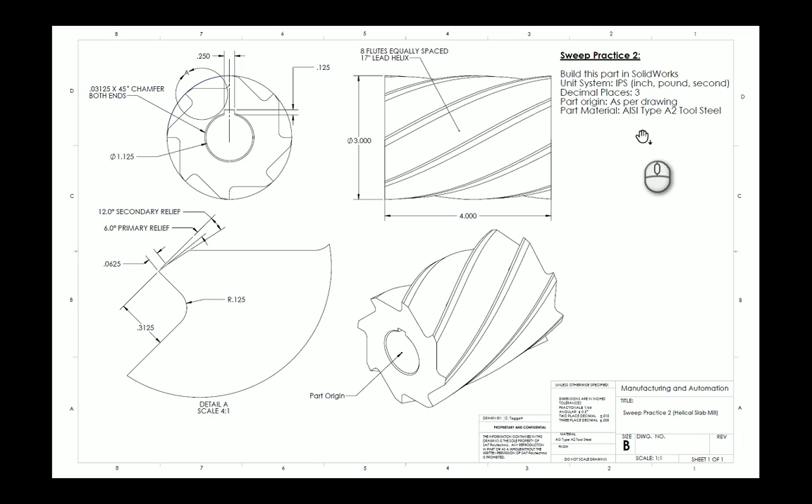So let's go to SolidWorks. Again, one of the things I would say is have the drawing open so you can follow along with me. I'm going to open a new part.

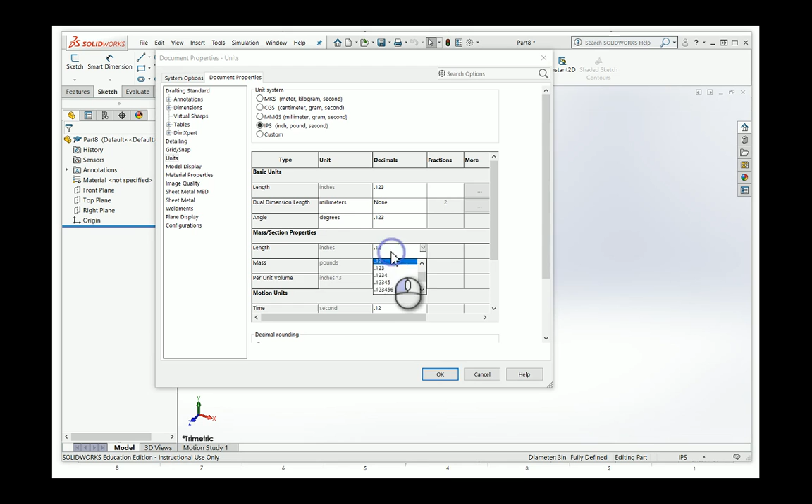My machine defaults to MMGS, so I'm going to change that. I'm also going to change the units. Let's change those to 3 decimal places. Say OK. So I'm all set, ready to go.

If you look at the isometric view, you can see the cylinder this is based on is sketched on the front face. So I'm going to click on the front plane and open a new sketch.

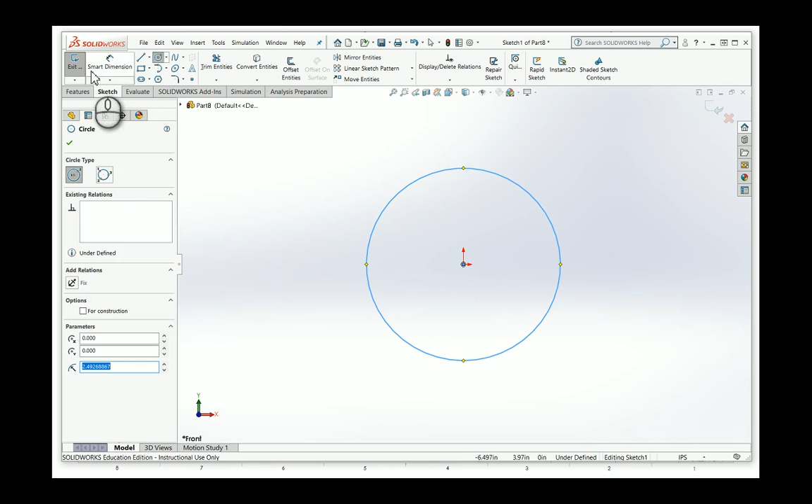I'm just going to draw my circle, which is 3 inches in diameter. Then I'm going to extrude that for the length, and it's going in the wrong direction, so I'm going to reverse direction, and I want it to be 4 inches long, and say OK.

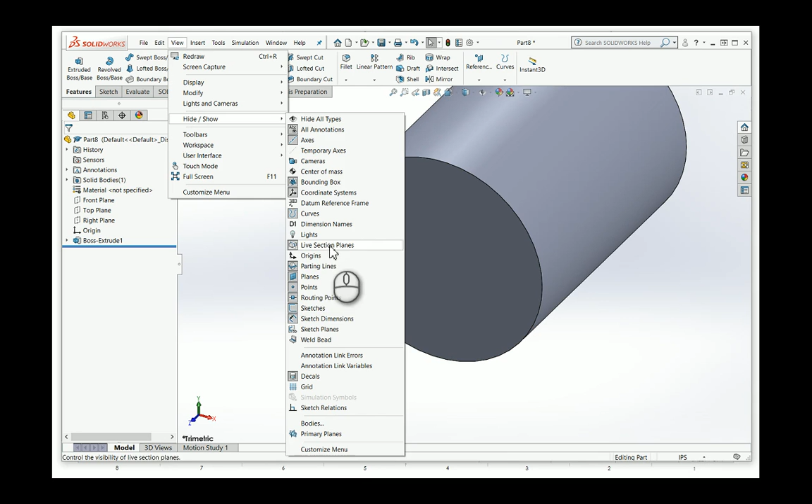And then just as usual, I'm going to check hide show origins. There it is in the front, and if I just turn that and go back to isometric, there it is perfectly in the correct position.

Now what I'm going to do is create my helix. What a helix needs is just an open sketch with a circle in it.

So I'm going to click on here and open a new sketch. I'm going to go normal to it. And what I'm going to do is just touch that edge and convert entities. That's brought a circle into my sketch.

The reason I chose to convert entities is because if at some point in the future we change this model to make the slab mill a larger or smaller diameter, that circle will automatically compensate and stay with the new size. If I just gave it a blind 3-inch diameter, and later we change the model, probably the helix will fail—it either won't contact the material or something will go wrong. So this is good practice.

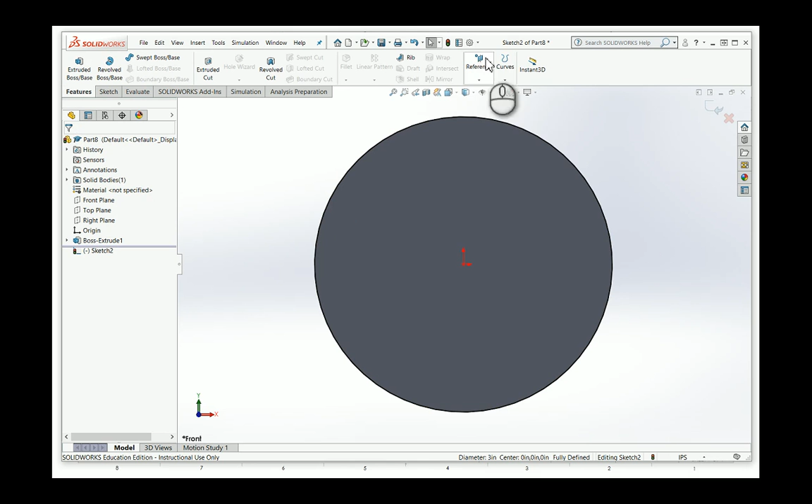Okay, so what I'm going to do now is go to the features toolbar, and click the drop down under curves and select helix and spiral. So what I'm interested in—and I've done this before, so it's just picked up that same thing—but let's walk ourselves through it.

I can choose the way I select the helix: either by pitch and revolution, and it'll calculate the height; or height and revolution, and it'll calculate the pitch; or height and pitch, and it'll calculate the revolution. So we've chosen height and pitch. Spiral is what you get if you've got a traditional clock spring. So we're going to go with height and pitch. It's a constant pitch.

My height is the length of this guy, which is 4 inches, and my pitch, which is the same as the lead in this case, is 17 inches.

What you might find is that this guy is out the front like this. If that's the case, just reverse the direction. And you might also find that it's in an awkward position. I want my helix to start at the 12 o'clock position, which in mathematics is 90 degrees. It might default to clockwise, but ours is actually counterclockwise. So I'm going to say OK.

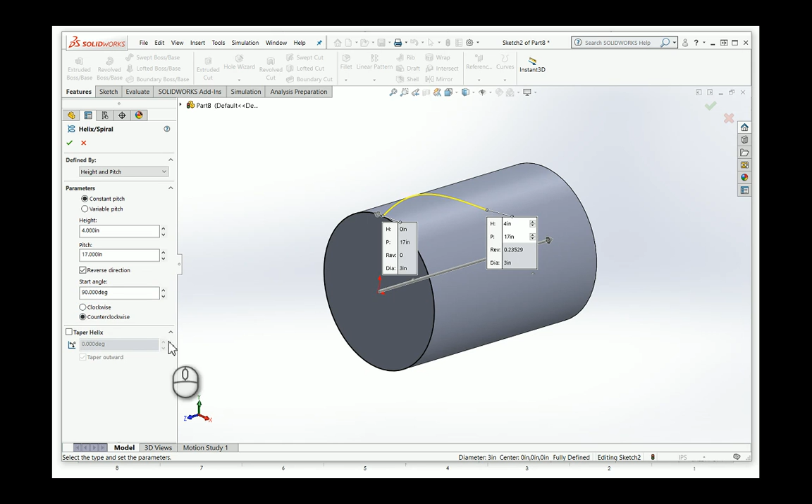So what I've got there, and it shows up as being blue, this is my path, the path that my swept cut is going to go down. What I'm going to do now is open a new sketch on that front face. I'm going to click that edge again and do another convert entities. This is where I'm going to sketch the shape of the groove that I'm going to cut in this. So far so good.

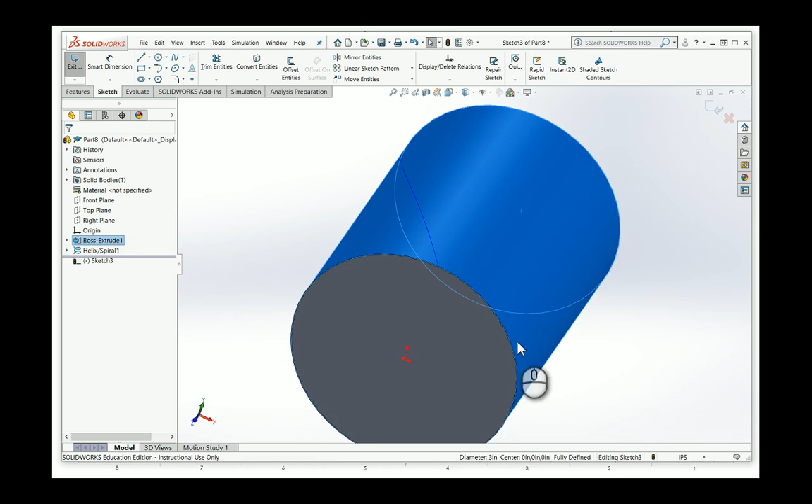So what I want to do now is hide this guy, so I can't see that solid body anymore. For some reason it's going a bit crazy. Let's just do this. There we go. So there I've got my helix there. All right, so now let's just start sketching.

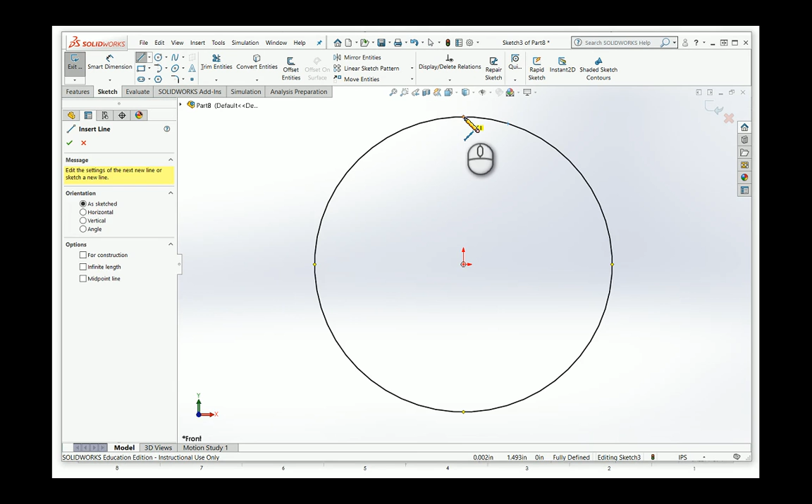So what I'm going to do is put in a tooth here, and you see it gives me top dead center. I'm going to come down and go out to here. Let's just zoom in a bit. And then I'm going to go down like this, and then down again, and finish that on the circle there. All right, so that's snapped to the circle.

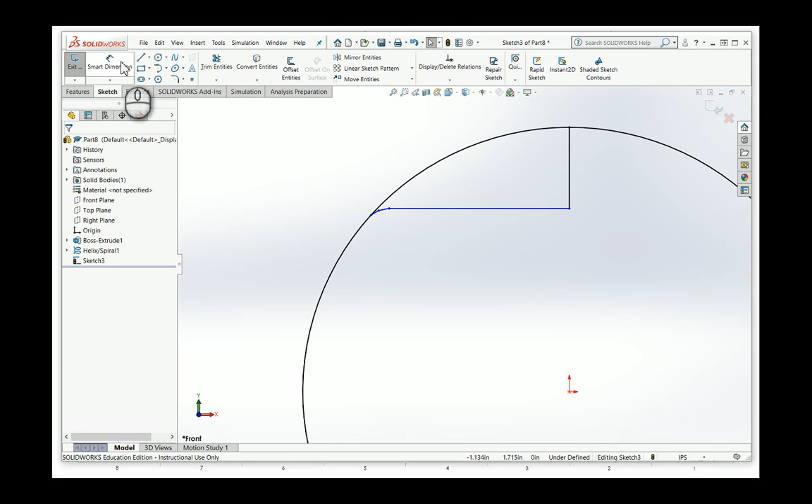So what I want to do now is I can do all sorts of different things, but what I'm going to do is actually put in a center line, two center lines, one here like that, and another one. And you remember center lines don't affect our 3D model.

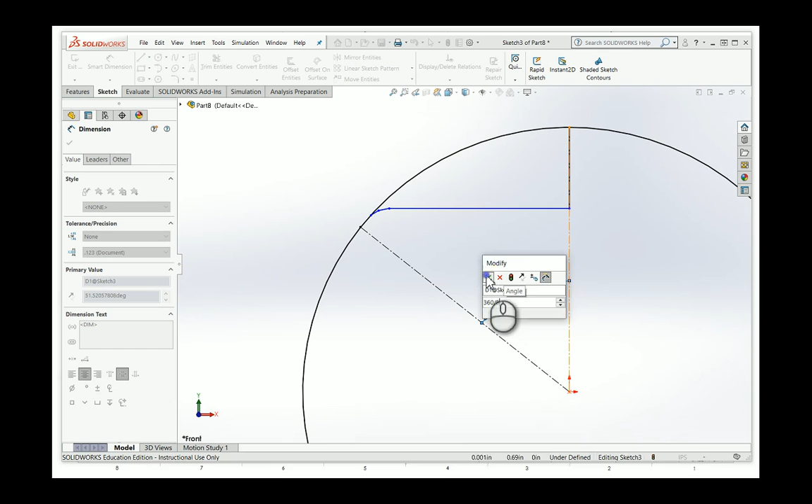What I'm going to do then is dimension this 45 degrees. And if you're not sure why it's 45 degrees, it's 360 degrees divided by 8. And you remember I can use this as a little calculator and say OK. And that gives me 45 degrees.

OK, and what I want there, this is going to tell me the size of the tooth. So what I want to do there is just move this guy. I want this to be coincident with that.

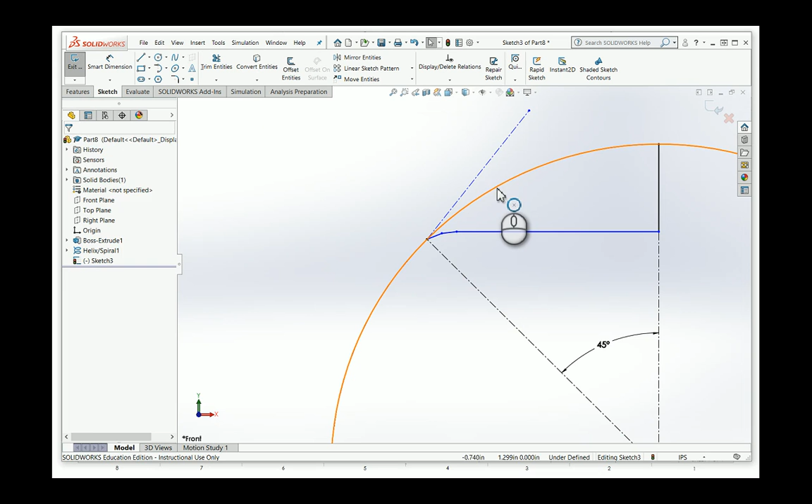What I also can do now is take this, create another center line, start it on there, and just put it out here into space. And now I'm going to create a relationship. I'm going to click the circle, hold down Control, and click the center line, and I want to have a tangential relationship. The reason I want this is because I need a reference to be able to do these two angles, the 12-degree angle and the 6-degree angle.

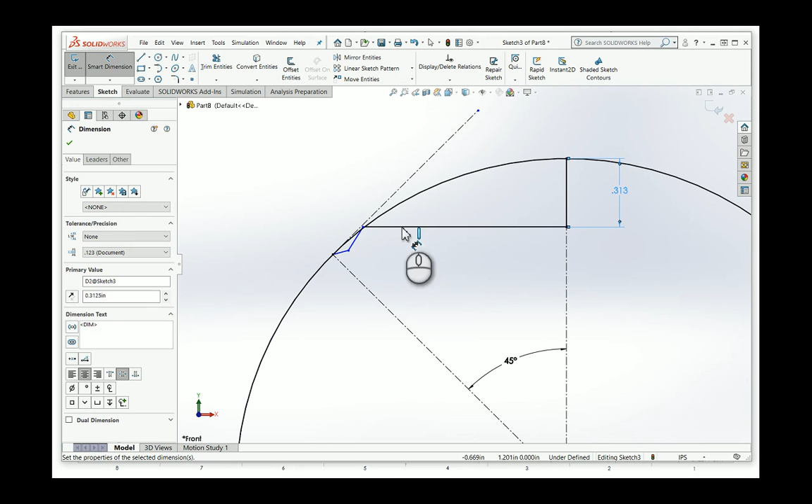All right, let's pop in some dimensions. So this guy here, I think, is 0.3125. That's that. You see that's gone a bit cattywampus on us. So we can pull that out a little bit, and this a little bit.

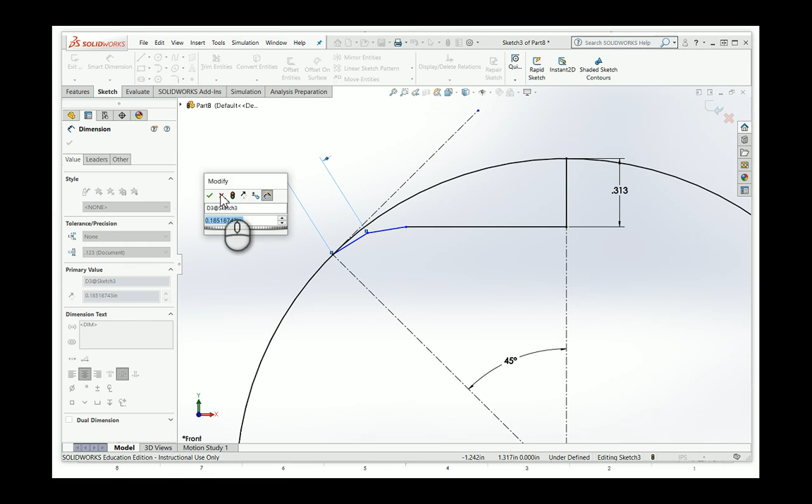All right, so what else have we got? So we know that this line here is 0.0625. Now be careful, because it gave me the wrong thing. Be careful, because what I want is the length of this guy. So I can just hit that.

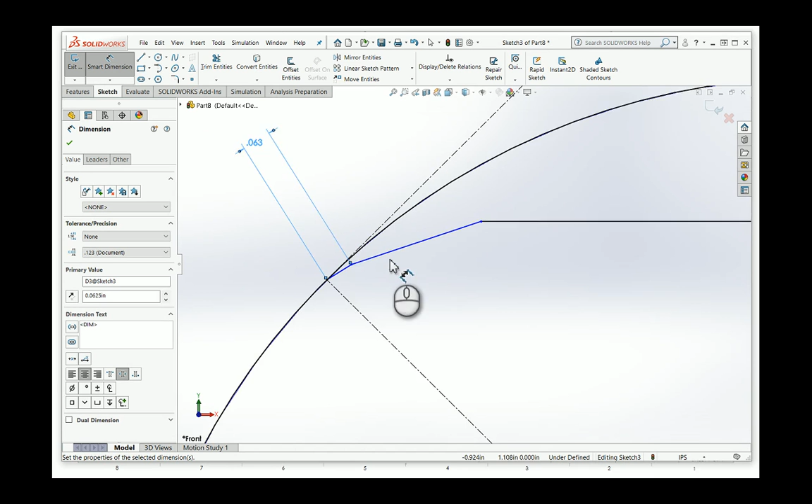0.0625. Enter. That's that. And now what I've got is the primary relief and the secondary relief, and these are an angle. So I click on that guy, and that now is 6 degrees. And then I do the same with this, and that is 12 degrees.

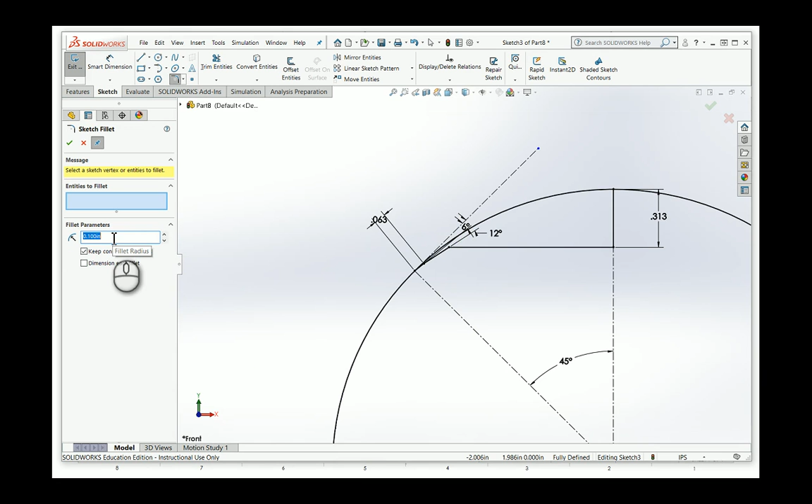And that's what's called the primary and secondary clearance. Okay, so that's all good. The only thing I need to do now is to put that radius on there, 0.125. And I'm just going to hit this guy, say yes please, and that's that.

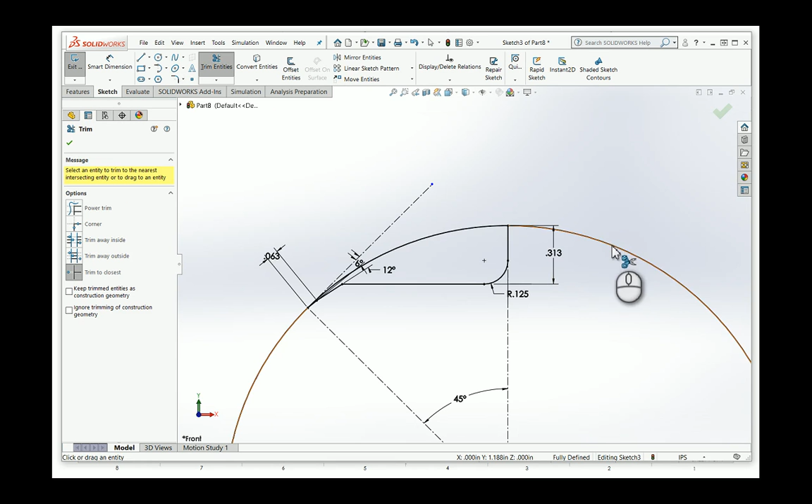Okay, so there's the cut that I'm going to make. What I need to do now is to trim the rest of the circle, because I only want the circle in that one spot. So if I trim that, there you can see now I've got the

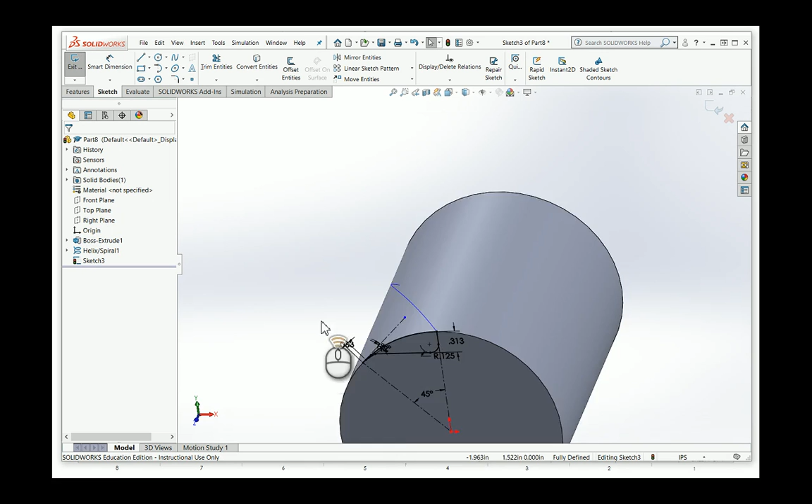path there, and I've got the form that I want to cut. So what I can do now is I can unhide this guy, show it if you like. There it is. So what I need to do, what the

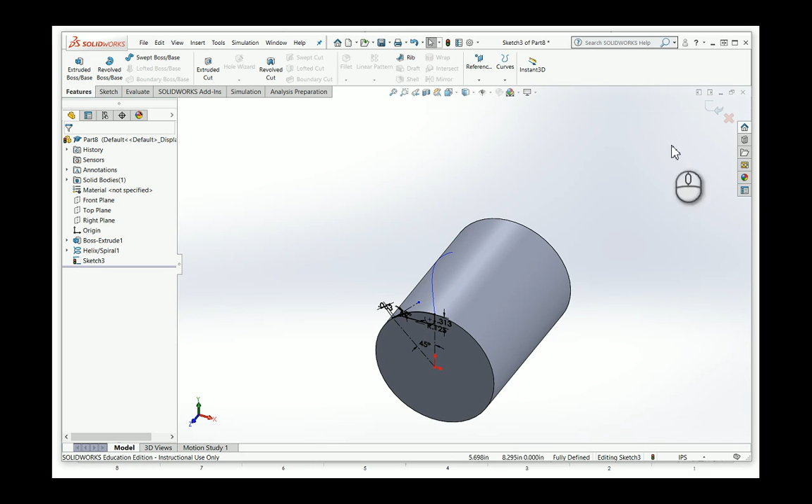pattern will need in a minute, is it will need an axis around which to do the pattern. So I can go to reference... oh, I'm still in a sketch, that's what the problem is. All right, let me close and save the sketch.

Okay, now I can go to this guy, and I want an axis, and basically I can just give it this cylindrical shape, and I've got an axis there.

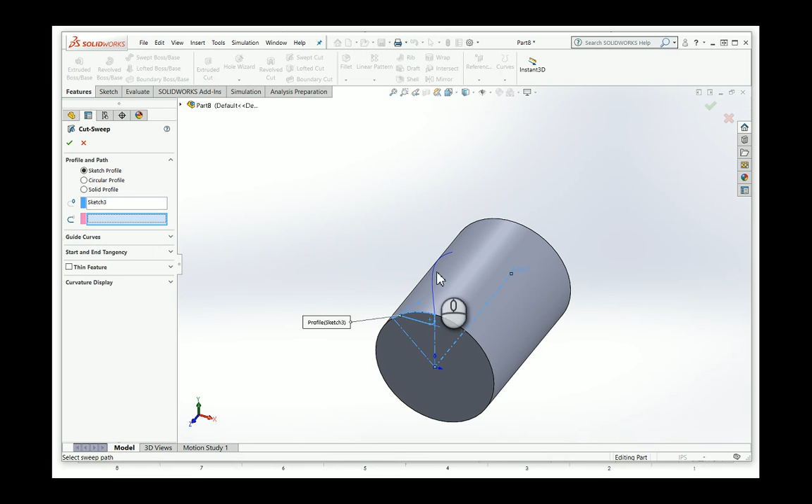So now what I want to do is go to features, and this time I want a swept cut, and that's this guy, and it's saying what's your profile, and it's this guy, and then it's saying what's the path, and it's that guy, and you can see it's given me a preview, which is always a very good sign, and I'm going to say OK.

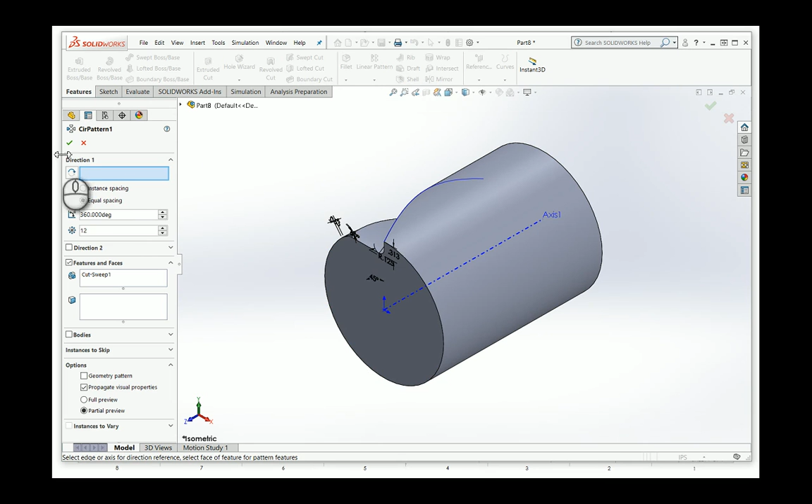So that's the first one, but of course I need 6 of these. So what I'm going to do now is click linear pattern, features linear pattern, and choose circular pattern. Okay, and then what it needs is the axis, and I don't need 12 of them, I want 6 of them in 360 degrees, equally spaced.

It's already picked up the features that I want, so I just say yes please, and there it is. Okay, so I can hide the axis, I don't need to see that anymore, that's with the little eye, and I can hide the helix, I don't need to see that either. Okay, so far so good.

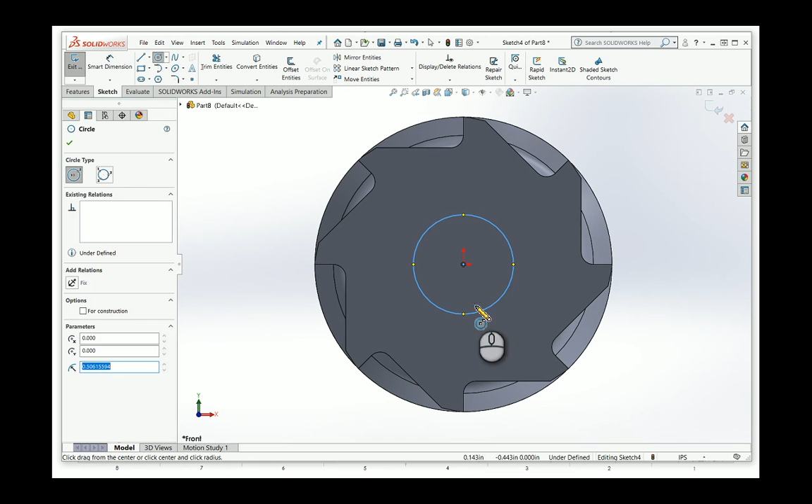Now all I need to do is to pop in the hole and the keyway. So the hole is... what is the hole? The diameter 1 inch and an eighth.

So far so good. And what I can do, I can use exactly the same sketch to do the keyway. Let's see what we're going to do with the keyway.

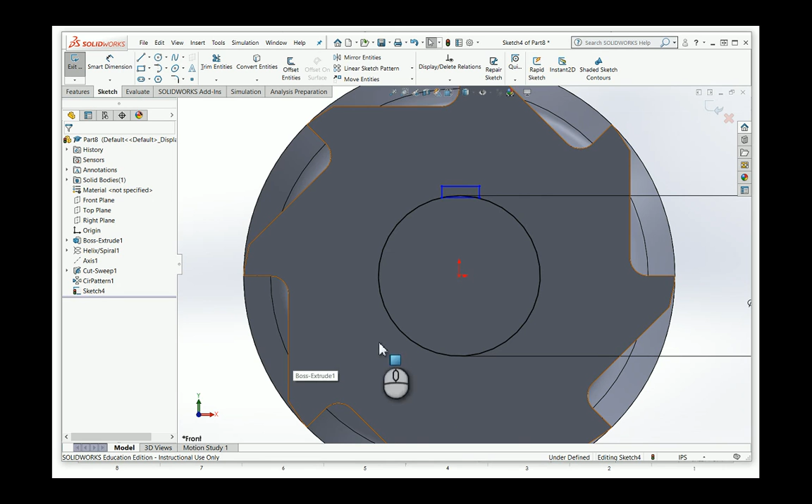It is 0.125, like that, and it's 0.25 that way. And now what I need to do is to position it appropriately.

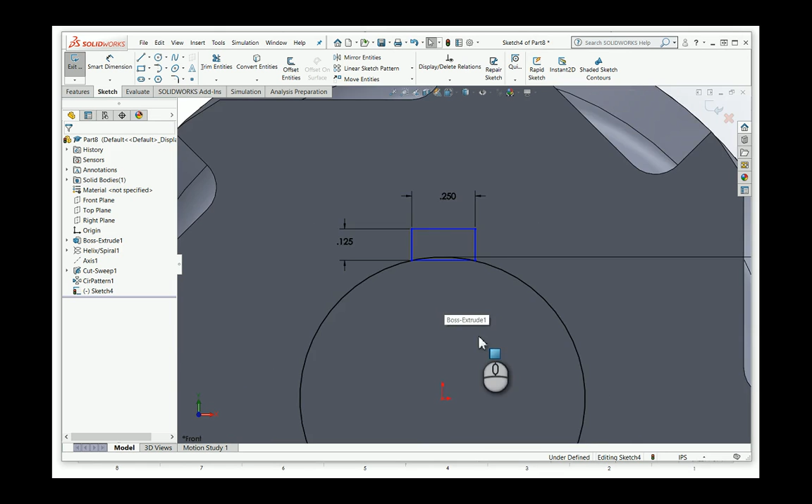So there's a couple of ways I can do this. One of the easiest ways is to right click, select midpoint, hold down Control and go to here, and I can make them vertical to each other, and you can see that I'm in good shape there.

So that's okay. So I can trim the bits that I don't need. I can trim that, and I can trim that. Oh, now I've lost my dimension, but let's see what I can do.

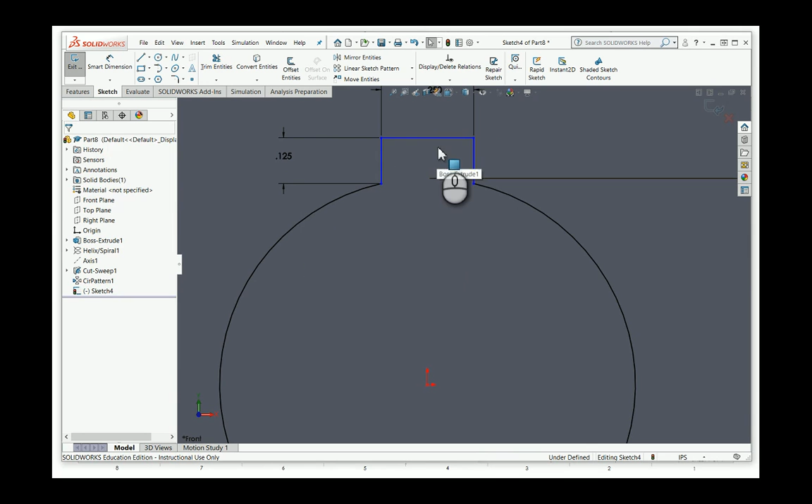Oh, I lost my... so I can just do the midpoint thing at the top here. Select the midpoint, hold down Control, and then I can choose vertical again. There you go. Say OK, and now I can go Features, Extruded Cut, and again let's choose Through All in case we change the length of this guy, and say OK.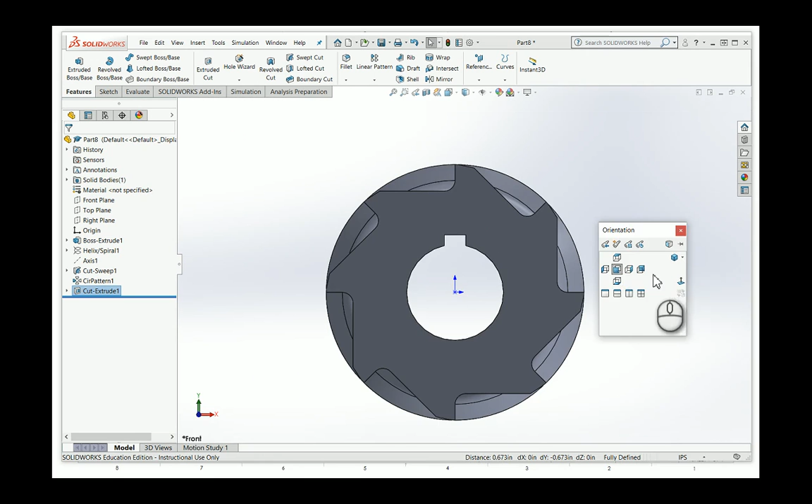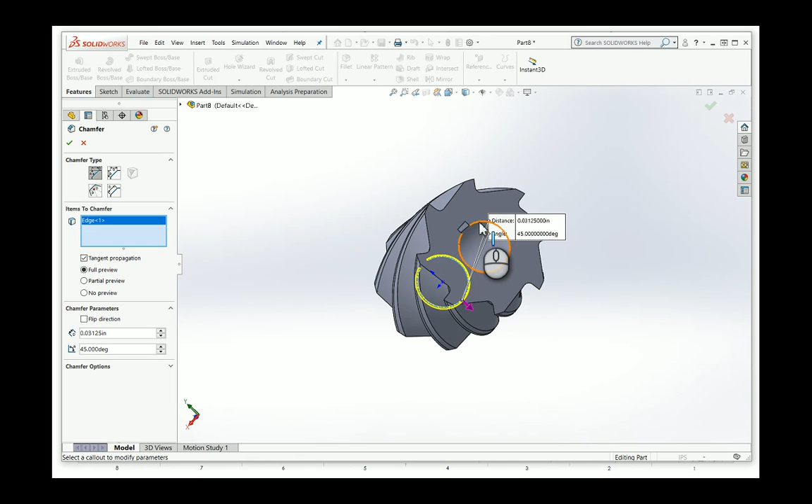So there's that. Two things left to do. There's a chamfer here, and the chamfer is 0.03125. So let's click the fillet drop down and choose chamfer, and it's 0.03125 like that, and I'm going to choose that, turn the world and choose that. So they're my chamfers. That's okay.

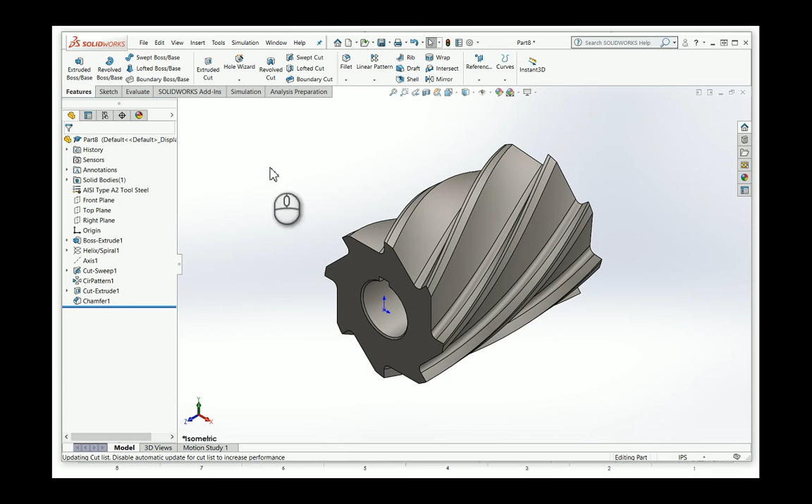And then the last thing I need to do is to change the material. So right click on material, edit material, and it's AISI type A2 tool steel, apply and close. And there it is. Thank you very much.